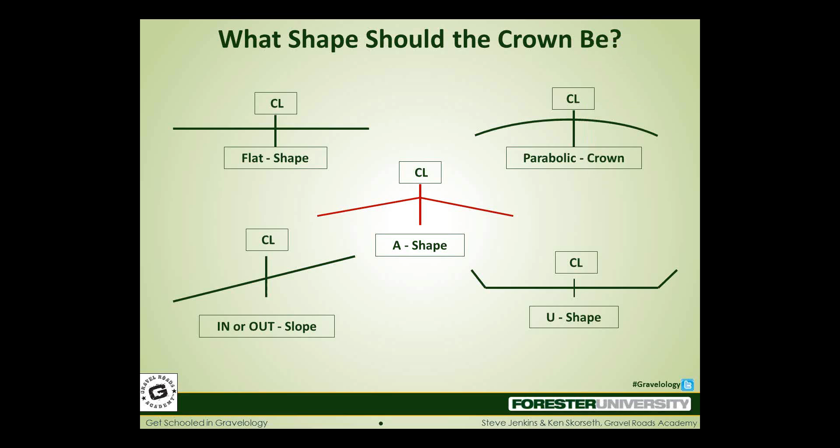So we've already decided on the A-shaped crown. The ideal slope that most research comes up with is a half inch to three-quarter inch per foot. For today's purposes, I'm going to stay with a half inch per foot. That way the crown is not excessive, it's achievable, and it is comfortable for drivers to maintain their position on the roadway. If we think about a 24-foot road, two 12-foot lanes, from center line to edge line at a half inch per foot, there would be 6 inches of fall from center line out to our shoulder. And ideally, again, it would be a continuous uniform slope.

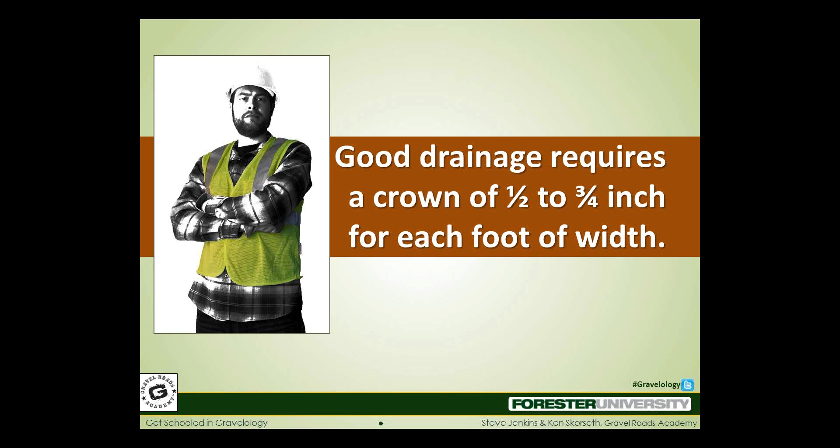Those that try and achieve this find that they'll undercut the shoulder a little bit and leave this berm on the shoulder. That comes from lack of good material, and when we don't continue that slope all the way out to the ditch line or daylight the slope. And we really defeat what we're trying to do.

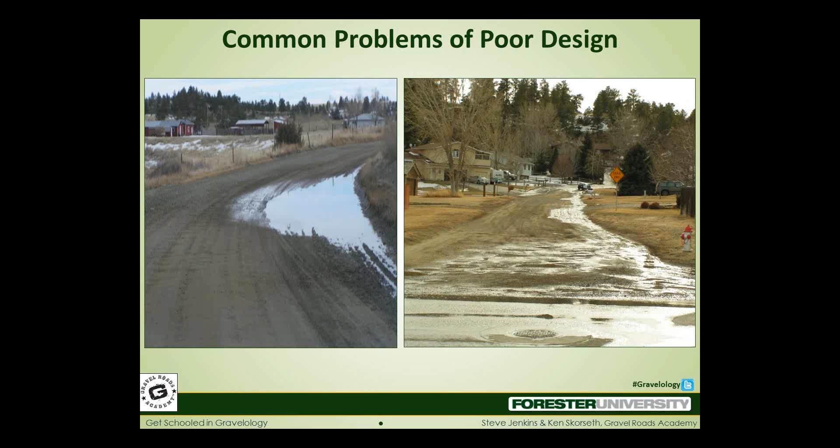We need to talk about drivers' behavior or their habits. Anybody that's driven a gravel road will notice right off that drivers tend to crowd the center. Things that push them to the center are inconsistent crowns, inconsistent roadways or edges, parked cars, obstructions. When we don't keep the center of the road the center of the road, the driver's always going to want to either straddle the center or drive in three-wheel tracks. This is a very good picture of how the center of our road, which receives twice as many loads, wears out quicker. So the more consistent we are with maintenance, the better off we're going to be.

Now I want to ask a quick poll in terms of who we have in the audience. Which of the following best represents your role? That of the laborer, a motor grader operator, a working foreman, a road supervisor, or other, possibly a decision maker or elected official. Again, the question is, which of the following best represents your role? A laborer, motor grader operator, working foreman, a road supervisor, or other, a decision maker or elected official.

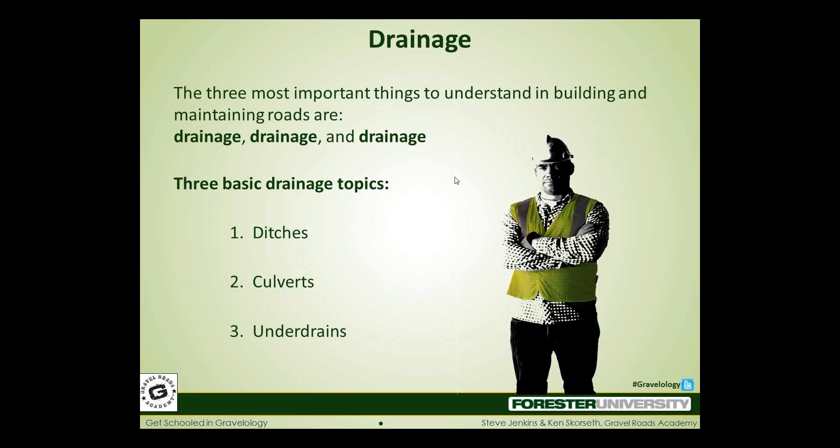This time of year we see the drainage problems. If there are washboards on our roads, they get magnified or become larger. These are usually caused by the natural frequency at which a car suspension will vibrate. You'll notice these washboards are worse where people brake or accelerate aggressively. But once that water settles in the low spots and softens that material, they become larger very quickly.

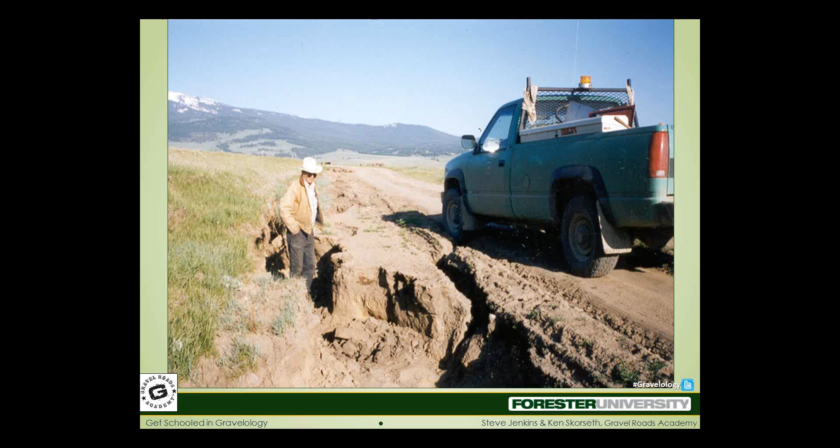Culverts can be overrun if they are clogged with debris, and water can flow right over the top of our roadway and damage our road. So there's a real need to pay attention to our ditches and culverts.

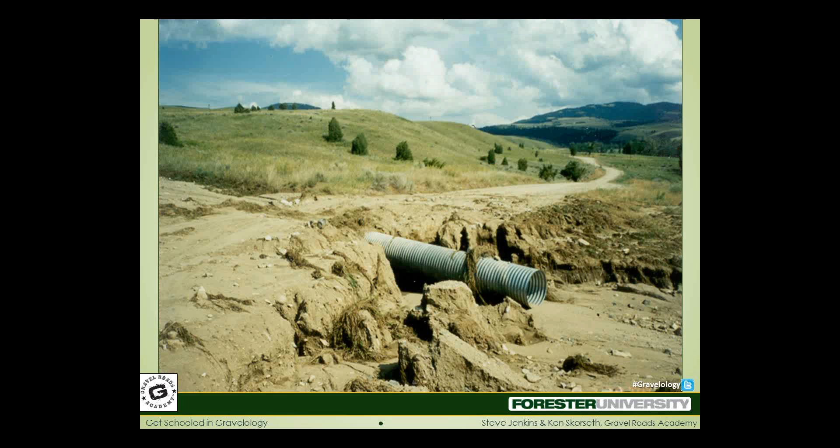Also, we need to look at the length of the culverts when we put them in. As you drive mountainous roads, if you notice these notches on any gravel road, it's an indicator that our culvert was put in too short or not placed where it needed to be. Now, granted, on a mountain road where people hug the inside of a curve, the road may have migrated to the left past the end of the culvert, and now you have that slight nick in the road. Either way, care should be taken to put in culverts that are long enough.

You need to take into account the height of fill. If your side slopes are on a 3-to-1 and you're on 6 feet of fill, that would put 18 feet on either side of the road, additional length added on to your 24-foot road width. So you'd have to put in a 24-foot pipe and then 36 feet more. Special care should be taken to put in pipes that are long enough.

Preparations for doing good maintenance: always you should put your signs out. In some rural areas we allow the driver to put out one sign, grade to the other end of the road, and then put a sign out on the other side. But they should be in place. Also, he should have a rotating beacon or strobe light on his grader and a slow-moving triangle on the back.

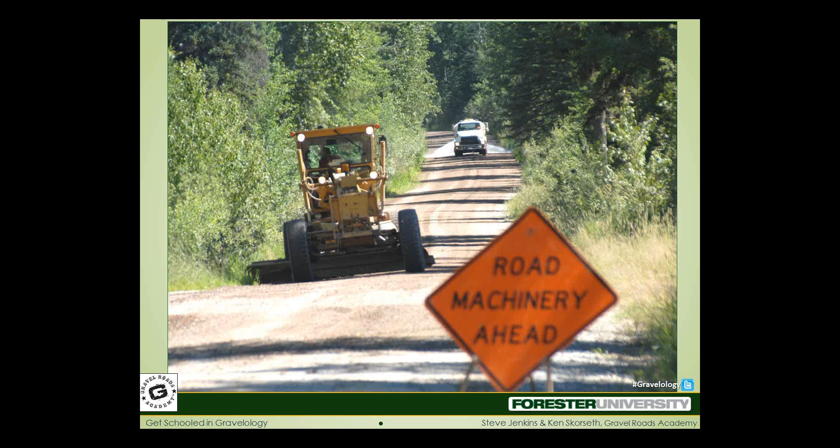This is Joe Miller, our operator trainer here in Montana who does training with me. You can see he's got a pretty full blade of material. He's going to be moving a lot of material today as I show you 3 or 4 passes. This is not intended to show you all of the passes needed for, say, a rehabilitation of a gravel road—this is where we reshape the road. It's not just smoothing and leveling, and we really recommend that the gravel road be reshaped before we do any kind of treatment.

I'm just going to summarize the passes made today. You can see that the material has been pulled out of the ditch. It's up on the roadway, on the shoulder, and we're working that road to the center of the road.

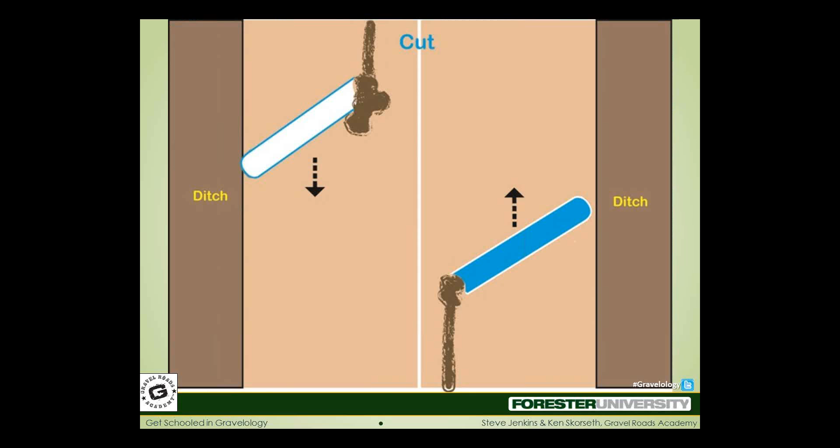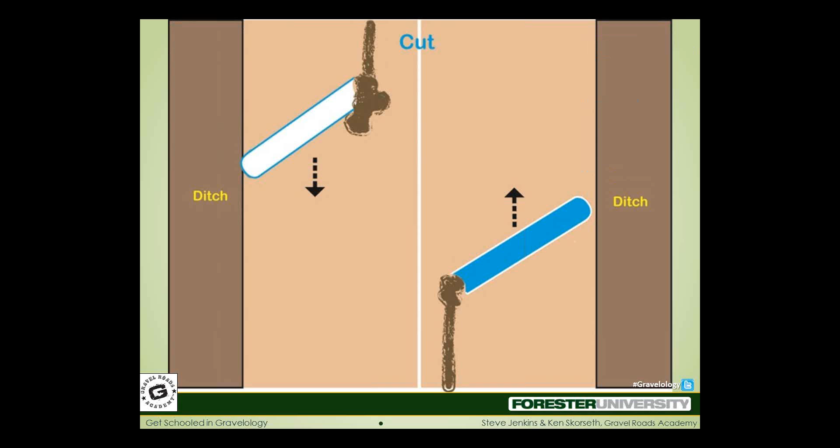At 45 degrees, the width of that moldboard, if it's a 16-foot moldboard, is going to be about 9.9 feet. If they catch that windrow on the outside edge of that blade, they'll be able to move it clear across, pretty near the center of the roadway, maybe 2 feet shy of the center.

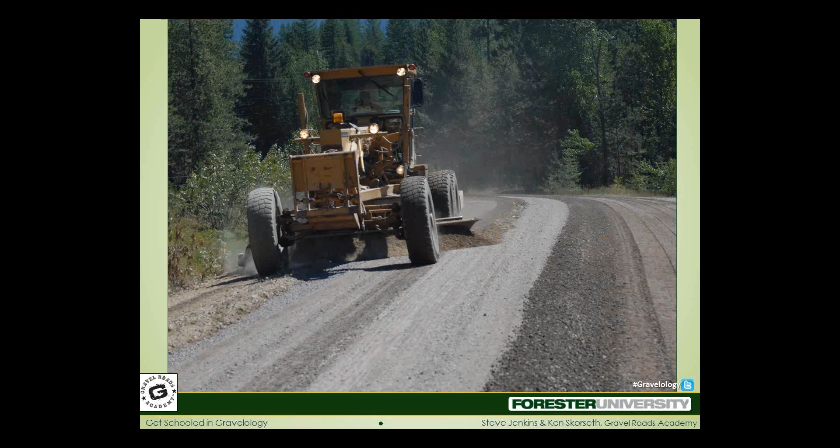You can see that's exactly what's going on here. Joe is moving that material a good 9 feet in towards the center. You can see the center of the road between the two windrows. The ditches have already been cleaned—he's just bringing in the material he retrieved from the ditch, and he's cutting to the bottom of the defects in that roadway.

He's already started his compaction there. What he'll do is combine those two windrows near the center and kick them over into a uniform windrow on, let's say, the right side of this picture. Then he'll perform a layout pass, working the material both ways across that lane.

His last pass takes what material was left of that windrow, hopefully half of it, and spreads it across the right lane of that picture. He's compacting at the same time, and you can see the uniform, clean surface he gets. After the process was complete, he has a slope of 4%, which equates to a ½ inch per foot.

I highly recommend these slope meters. It's very hard for an operator to get the slope desired without them.

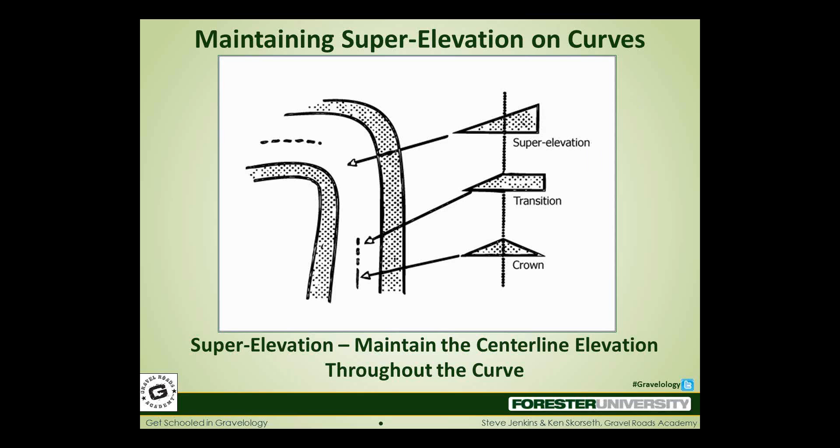But in any regard, once we get that curve stabilized or set the way we want it, we should stabilize it with a chemical to avoid movement of material.

As I travel around the West and teach, I always like to pull up a geologic map of the area where I'm teaching and even get into more detail in the specific county where I'm at. It shows you the type of material that's available.

Most often our pits are alluvial pits where nature has collected gravel for us. One problem with that type of pit is that the sizes of material have been separated due to the stream flow at that time of year. So you'll get bands of sand or gravel, or even up to cobble. As the river slows down, it loses its ability to carry large material, and that's dropped out in certain layers or as the season progresses.

So we get those banded pits where a loader operator has to blend that material. What we want on our roadways is a well-graded material, a little bit of each size mixed in. And on the surface, there should be specific interest in our silts and clays, the finer grain materials.

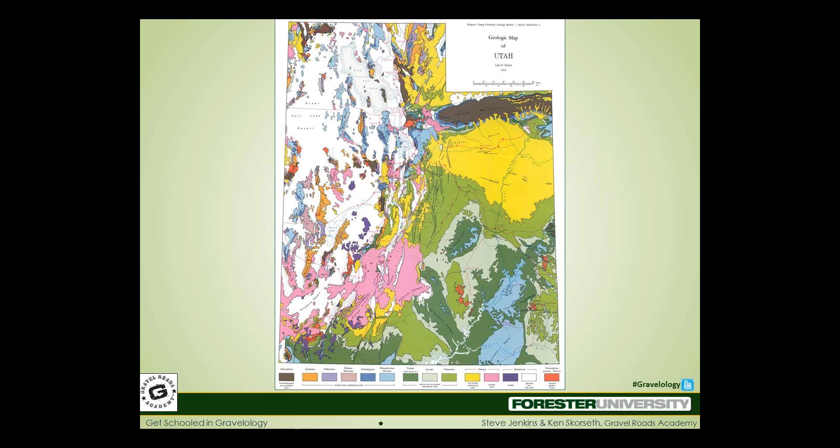The most common sources of material are quarry aggregates such as limestone, quartzite, granite, and even glacial deposits of stone, sand, and silt. And then we also get the river run gravel that's separated. So we have to become familiar with that pit and know how we're going to blend the material to make it most useful for gravel roads.

So then we need to blend in all of the different sizes. And when we purchase gravel, we need to make sure that we have a spec. If we process it ourselves, we need to do good handling or good processing techniques. If we purchase gravel, we have to have a spec to be able to communicate with the supplier exactly what we need.

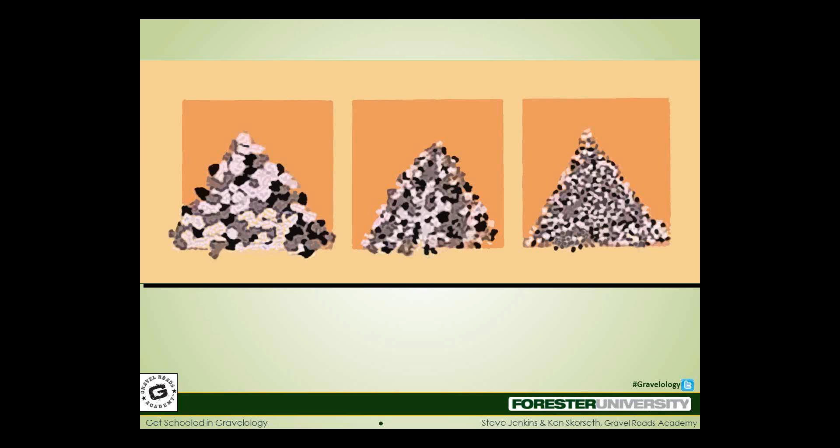We give our counties a typical section. It's very useful. This just summarizes that the base material can be larger rock, up to 6-inch material, and it's okay if it's a little more rounded.

When we get to the surface material, the top 4, 6, or up to 8 inches, we want that to be 1-inch minus material. Ideally, it should be at least 50% fractured faces. I know in some of the DOT specs, they talk about 90 or 95% fractured on 3 faces, so to ask for 50% fracture is not too demanding on these suppliers.

Our side slope should be 3-to-1 or 4-to-1 so that it's a recoverable side slope. If we look at the base down below our road, we assume that that base is either a low, medium, or high support subbase. Ideally, we'd like a high support subbase. That number, CBR of greater than 10%, is a measure of how stiff the subgrade is. Between 3 and 10 on the CBR ratio would be medium support, and low would be less than 3.

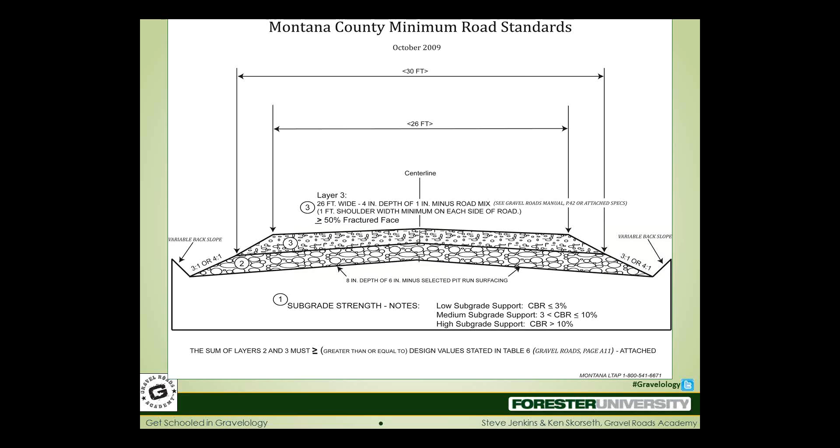If we have low support, we're just going to need more base and more surface material. Now those two layers combined need to add up to our design thickness to help distribute the weight of the very large trucks and equipment, agricultural equipment on our roads today.

Just a quick example of how to use this chart. First of all, we need to know what traffic is on that road. As far as deep damage and rutting on our roadways, the only vehicle that's going to cause that problem is heavy trucks. Now, I agree, vehicles, pickup trucks, horse trailers, empty, they're going to cause surface disruption, but the deep damage is done by heavy trucks.

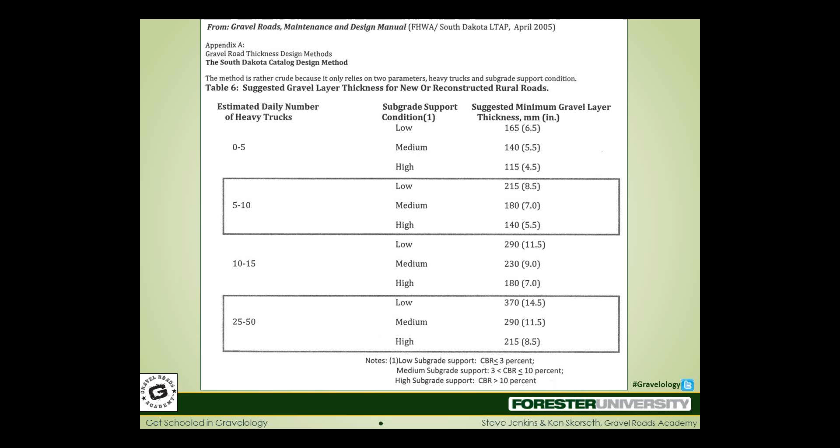We need to be able to spot check our material on the road to see what's out there and see how we can blend that with other material. We should also have a set of sieves to be able to test the material that we're either producing or purchasing, and put them in the back of the truck. If we never use them, it makes us look good by having them, but I feel they should be used daily.

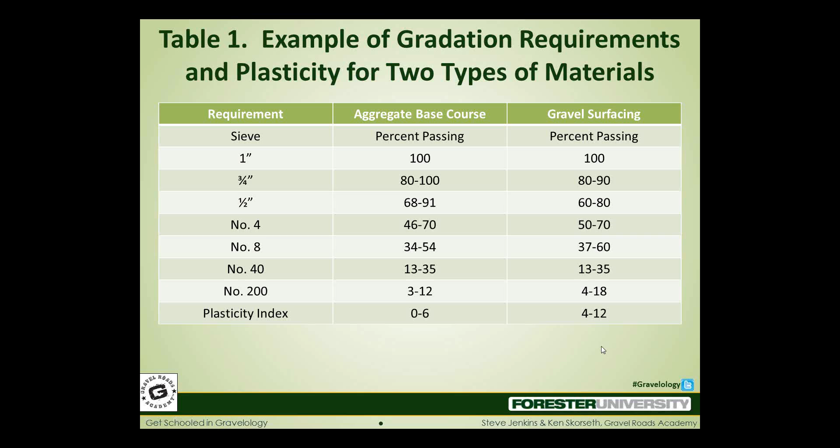I know I'm going on about material. It is one of my favorite topics. It's also one of Ken's. This is an indication of the plasticity index.

Okay. Slides aren't advancing very quickly here.

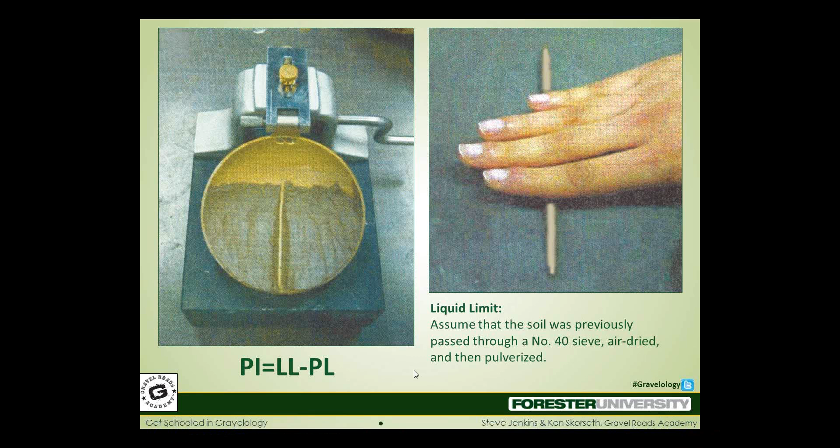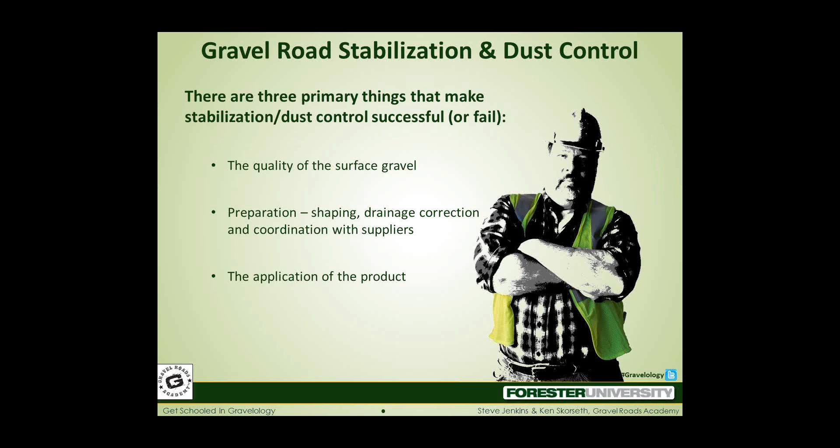One thing I'm going to show you are just three slides here. First this one, two more, three more, about projects in which I've either been involved or have observed and had contact with managers.

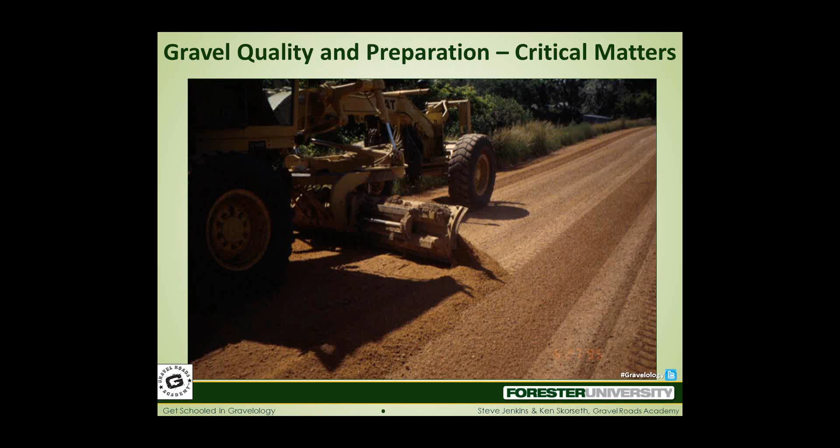19 millimeter sieve, and I like this if you have high volume, you're going to treat, and you want to get as close as you can to pavement performance. Otherwise, I have no problem with 100% passing 1 inch or 25 millimeter, which he defined also. Excellent work here. I will simply mention this.

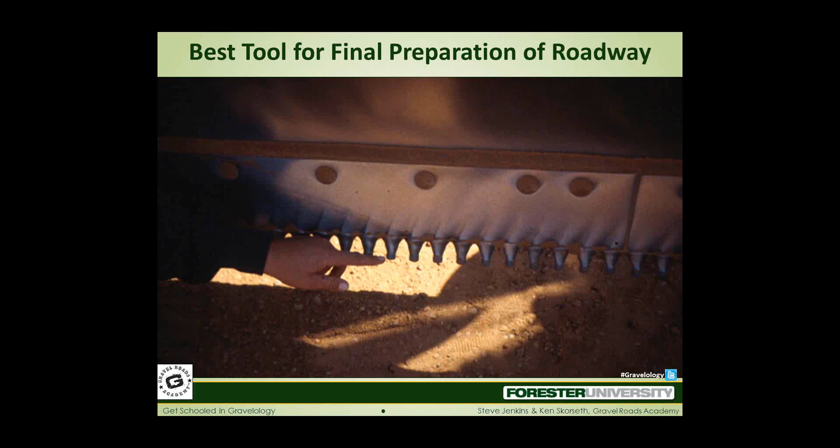Steve recommended between 1/2 and 3/4 of an inch drop on the cross slope. 3/4 would be 6%. I would caution you when you treat, and it's working well, these roads can take on something close to a pavement characteristic, and be careful with that. Don't you ever exceed 6%.

On the other hand, if it falls much below 4%, you get too much risk of potholing, and then you have trouble with a stabilized surface, because I've seen the potholes, but the surface around it will remain so tightly bound you just can't hardly scratch it, and it becomes difficult to maintain.

In this case we had gravel in place. The previous one had a fresh lift, 2 1/2 inches of virgin gravel brought in. This one was simply gravel in place. We had to loosen it. And I want to show you something here.

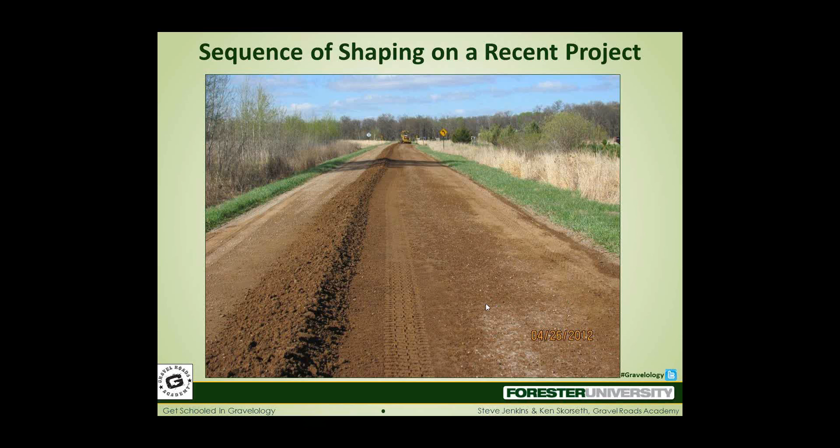The road lacked crown, and you can see where I was asking the operator to put some crown back in it. He's cutting here, if you can see my cursor, simply spreading here, same way as he came back up the other side. We've got a nice shine. He's cutting here, but laying loose material up here in addition to the windrow.

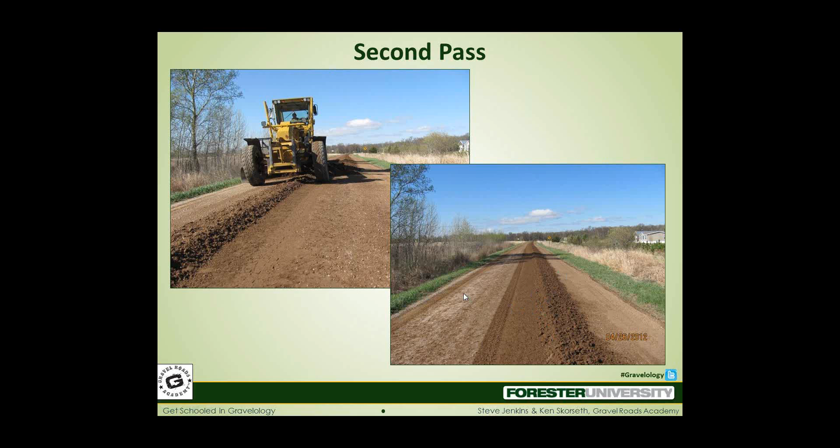What happens if you put this back out? You're going to have much more loose material here, right here and under the windrow, than you will out here, and you won't have a uniform layer to treat. So he made yet more passes. Now you begin to see the shine all the way up to the windrow, and that's what we want to see.

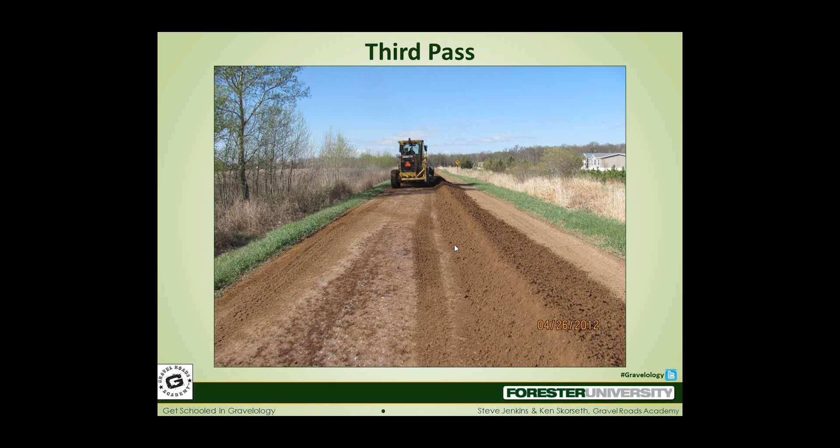He returns back up the other side. Now you begin to see the cut or the shine all the way up. Now we have uniformly shaped the platform on which we're going to work. Now you can split that windrow, put it back down, and it's ready to treat. You've got a uniform layer to treat.

In my experience, these projects seldom have much control. We don't go into them with a set of plans and specs. We don't even have a basic set of controls sometimes, which is kind of frustrating. So someone had better be out there at the field level managing this and doing a good job, or your risk of failure begins on day one.

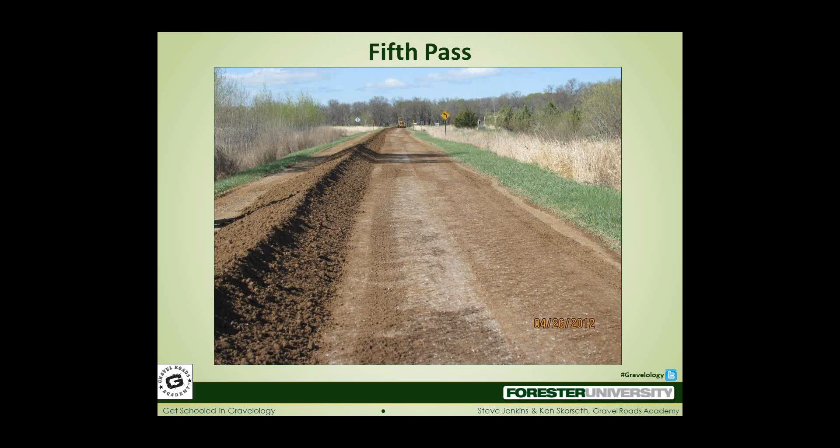Again, this is a nice sequence of preparing gravel in place. Now he splits the windrow. The road is very narrow.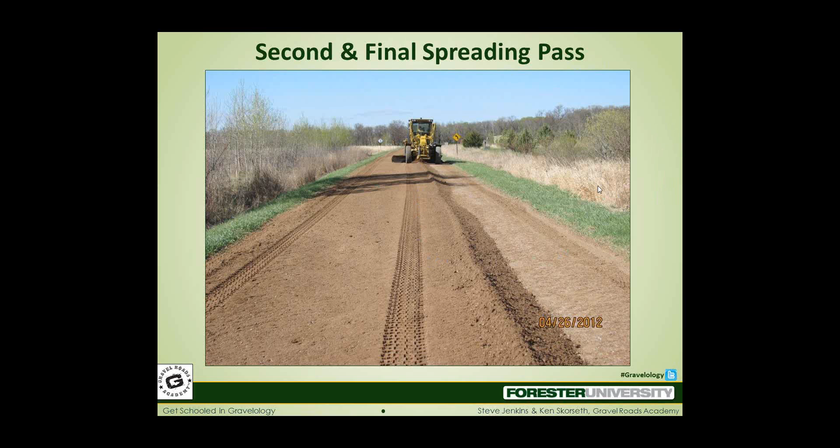He splits it, comes back up the other side, and I'm like, Steve, I just cannot express enough my appreciation and respect for skilled operators. He is perfectly cutting the road center right here. The other half of the material is placed over here, and then we prepare to treat. The key again is the gravel.

So when I go to the next slide, I would like you to look at the poll. I'll read it with a little emphasis here. You see the question, do you have a county road? And you may be working with other entities, but I might just modify that. Do you have a local road surface aggregate specification to work with?

You've got 4 choices. No, we don't have one. Or B, I'm aware of one, we're not currently using it. C, I'm aware of one, I don't believe we're using it, or excuse me, I believe we are using it. Or D, we have one and we enforce it. I'll repeat: No, we don't have a spec. B, I'm aware of one, but we're not currently using it. C, a little more confidence: I am aware of one, and I believe we're using it. And then finally, we have one, and we enforce it. Answer those, please.

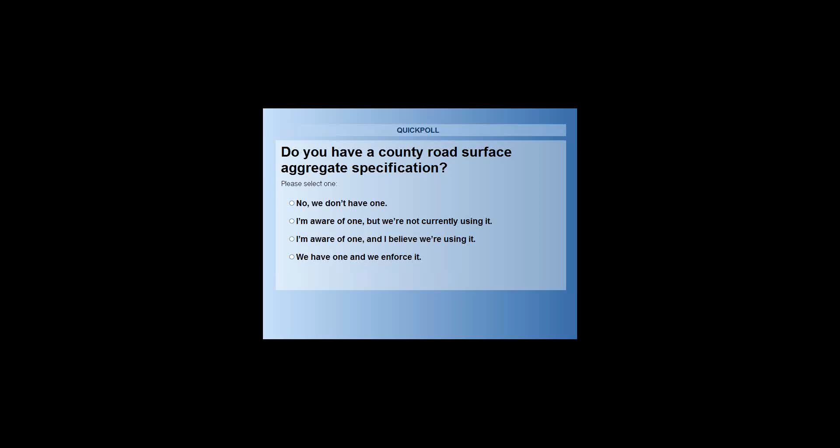And it looks like we have a pretty big variety today. We've got 36% come in that say, I'm aware of one and I believe that we're using it. We have 31% answered, nope, we don't have one. 22% say that we have one and we enforce it. And our last 11% said that I'm aware of one, but we're not currently using it.

Okay, thank you, Beth. I'm not surprised by this. Nearly 1/3 simply say no. Part of the problem there is too many of our states do not have a surface aggregate spec. In my case, my home state in South Dakota, we have one. I really appreciate that because it does give a standard with a pretty good authority behind it for which we can set up a spec, and contractors have to meet it. Otherwise, you do have to sort of stick your neck out. I will remind you, as Steve mentioned, there is a recommended spec, or at least a sample spec in the Federal Highway Gravel Roads Manual if you have nothing and you would like to begin.

Okay, I'm going to go on. Oh, I'm sorry, here was final shape. I just had those juggled. Very nice job. Here's where you must make a decision, two decisions actually that I'll comment about.

But the first one is, should we pre-wet? You cannot treat dry gravel with chlorides. That would be true with some of the other stabilizers as well, but particularly the chlorides. They will chase moisture down. This is right on the edge where you have to make a decision, should we or shouldn't we?

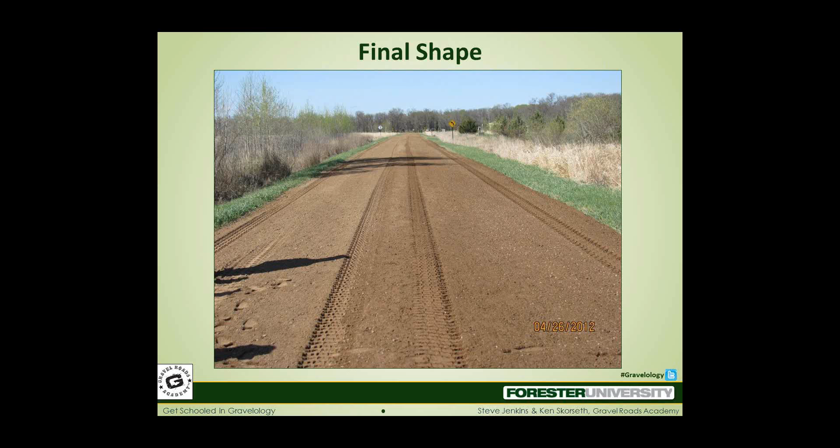Should you do this or not? Well, again, if it's cloudy and chilly, if I back up once, this will probably work. It has a damp appearance. That's okay, but when it's sunny, the day is going to be long. The sun's rising, it's getting warmer. We pre-wet. That's what we needed to do in this case.

Now, the next step, the application of the chloride, and I will make a comment without a slide, but you can see what we had done. We had pre-rolled one pass and get off of there. Only one pass, you be very careful with rolling. On the previous project where I only showed you the 3-slide sequence, we did no pre-rolling. We had a nice 1 to 2 inch loose layer, that was pre-wet and treated.

Here we had to loosen more material. We did one light pass with rolling. Now, the treatment with chloride, we needed to get 1/2 gallon per square yard into a 2.5 inch layer in this case. And it's very hard to get that in one application. You usually can't, so we treated with a 1/4 gallon.

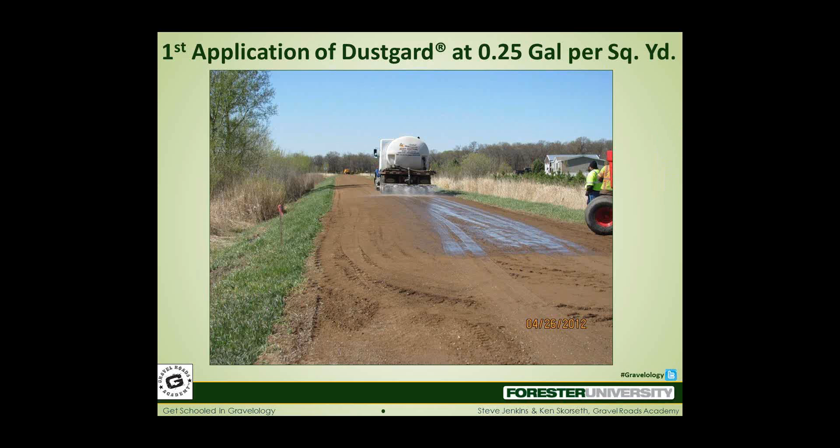You let that absorb, and I'm going to bring the cursor up. The other side may look the same to you, but we had treated both initially, and the other side has already absorbed 1/4 gallon. After about 40 minutes, we then did the second shot, and I'll make a point here. You watch this. If you feel you must do some rolling, watch this until you get good absorption. Do not ever put any compaction. No rolling when you have any shiny wet appearance.

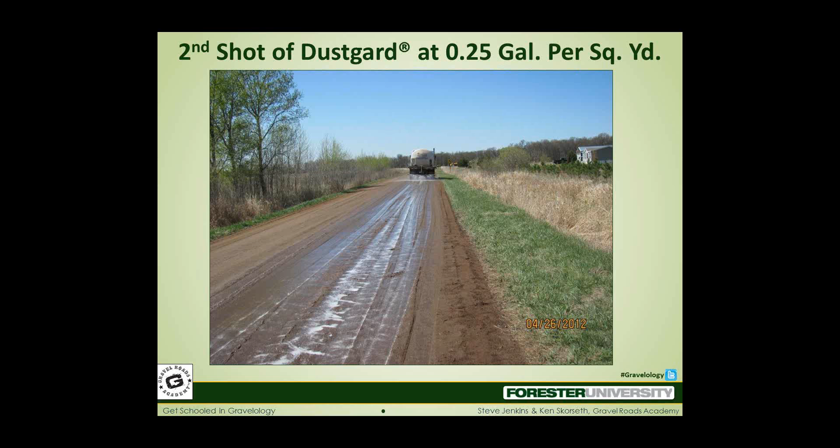When you have gotten 100% absorption and you feel you must do some rolling, I'm okay with that, but don't roll too soon, as already defined, sometimes not at all. It's a judgment call out there, and I'll make one more comment. I don't have text on there, but just remember this.

Roll the outer edge first because the public doesn't drive there. Then if you feel you must roll the traveled way, my best advice: one coverage of rolling is generally all you need, and get off there, and I'll explain why. Over-rolling will tend to pump that product back up, either very near or right to the surface, and that's what we don't want. We want penetration and absorption if you're truly going to stabilize.

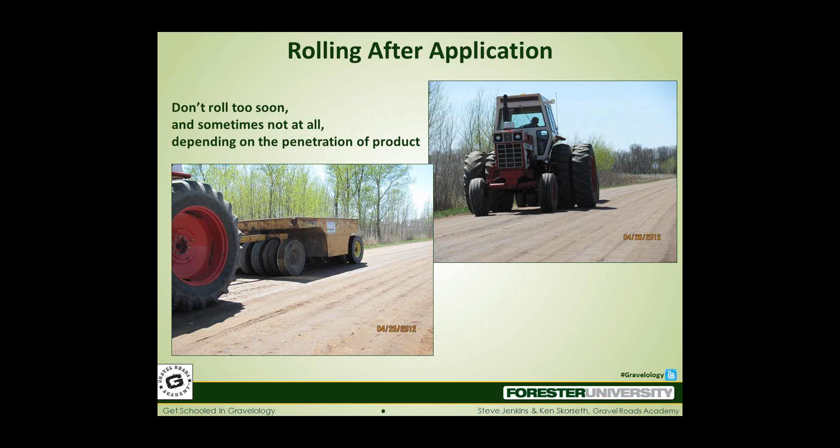Here's the project about 1 hour after the final application and one coverage of rolling. This is not ideal, the barred tires of an ag tractor, but it is what it is. That's all they had. It's a township. They don't have a lot of resources. Sometimes they want to do some more rolling to try to take this out. My advice, don't do it. The traffic will. This road performed beautifully for the entire season.

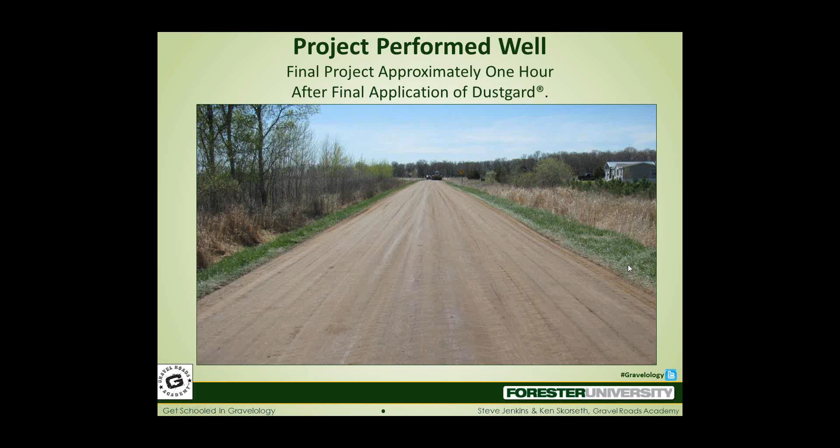In the cab, it has an onboard computerized application system, and they can dial in the rate, and it will hydrostatically then work with the speed of the truck through a hydraulic pump, and it will either increase or diminish the application here to match the ground speed of the truck. I really, really like these units.

Early in my career, we had too many that were simply tanks mounted on trucks, sometimes with nothing more than sewer pipe at the back as a spray bar with holes drilled in it. One gate valve, letting the product down through the bar, and too often what happened, we would tend to flood the middle, only dribble on the outside, and we did not get uniform application.

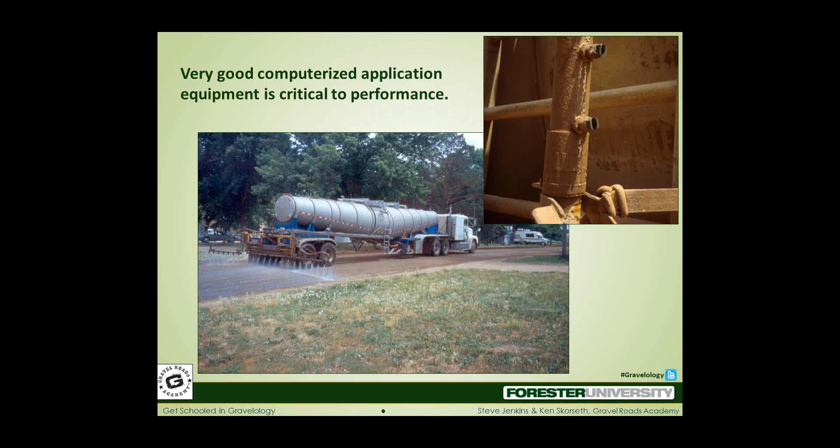They treat to reduce gravel loss and to reduce maintenance frequency with the motor grader. And when the gravel loss and the maintenance frequency of a motor grader either equals or exceeds the cost of treatment, they treat and they stabilize. Again, in this case, it's a liquid magnesium chloride.

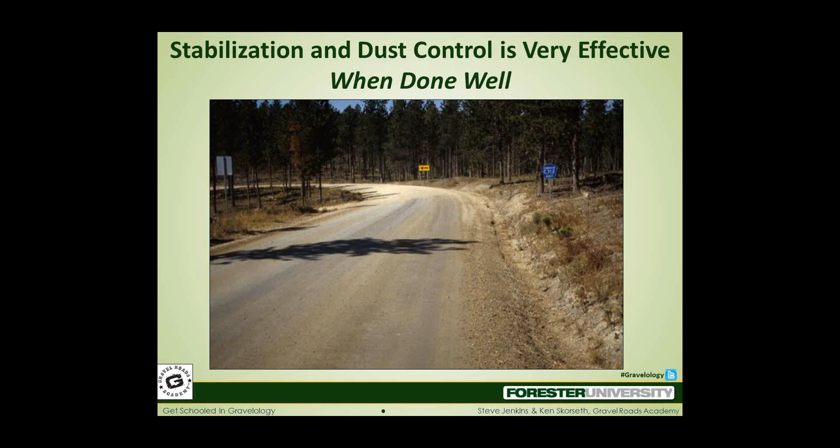So, of course, dust control is the bonus. I'm going to take you to another project that's been extremely interesting to us. I haven't watched this for a long duration.

By the way, the previous road has been treated continuously for 18 years. This is a newer project, constructed a little less than 2 years ago. I observed it last year after 1 year of performance. I'll tell you this is actually an alternative to paving, and I'll show you why here in a moment. But here's how it was done.

It goes without saying this is very high-quality gravel. I'm going to emphasize that again. I'm also going to ask you to look closely at that surface. Are there any signs of potholes or distress anywhere? No. Consequently, the value of prep and shaping, which Steve talked about, was also done very well.

Here's what they did then. You can read the text across the middle of the screen: 1/2 gallon. There's the trade name, but this again is liquid magnesium chloride, if you're not familiar with it, applied and incorporated in each square yard of surface at a depth of approximately 3 inches.

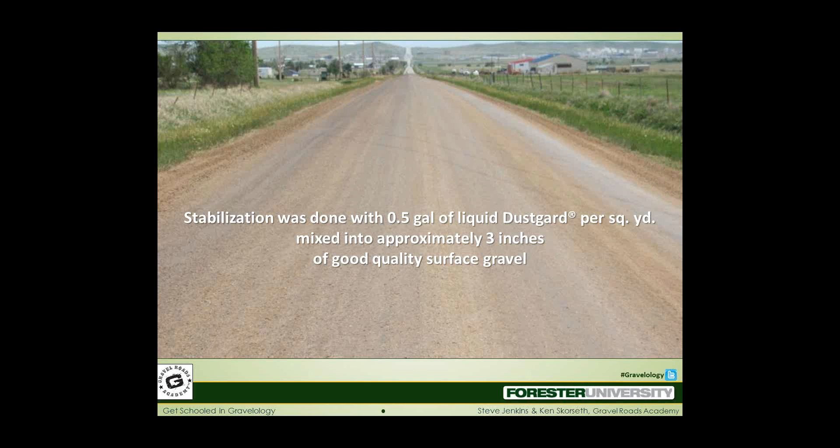I wasn't there, this is the data that was given to me. That treatment is a little lean for that depth in my experience. However, they had such high quality gravel in this case, it worked extremely well. It even worked on a significant crest vertical, a hill. They had no corrugation here with a 6% grade.

Here's the real bonus, if you will. This may be hard to believe, my friends, but I know the manager. I've been on this road 4 times in the last year, and we've gathered a lot of data. Absolutely no blade maintenance done in the year between initial treatment and then retreat.

You really ought to take a look at stabilization in this case, because the loss of fines plus the loss of aggregate off the surface plus the frequent blade maintenance required here very likely is equal to or even greater than the cost of a stabilization treatment. You have to make that call.

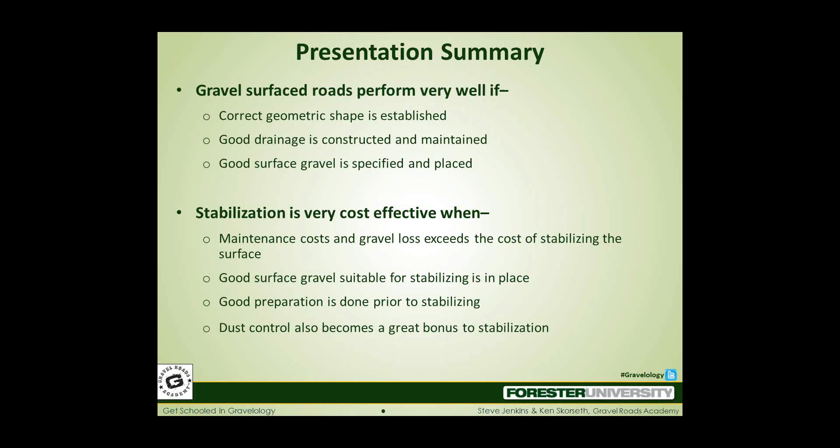It's very cost effective, and I want to emphasize that. If indeed your maintenance costs, generally just use of the motor grader, and then your gravel loss, although that can include drainage if you're continually plugging culverts and so forth. Again, if your total maintenance and gravel loss exceeds the cost of stabilizing, then do it. Good surface gravel suitable for stabilization has to be in place, though, for this to work. And then good prep of it, and then the dust control, of course, is also there. It's a great bonus after stabilization.